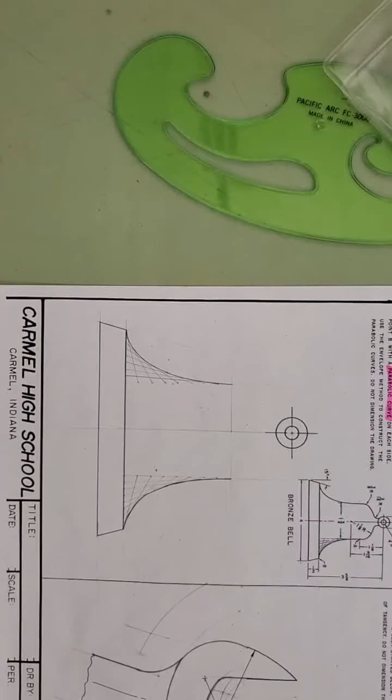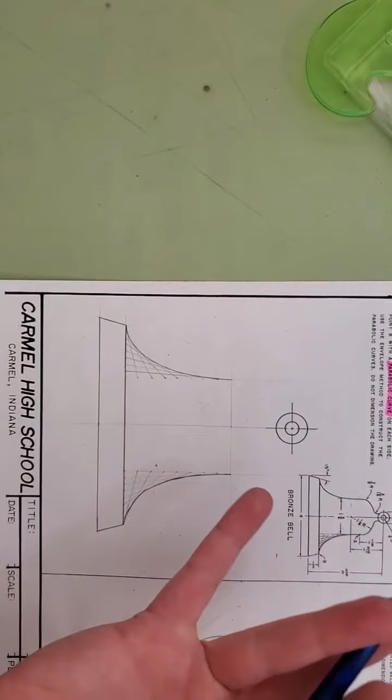So I just took a moment and I finished creating my second parabolic curve, and then I darkened in the curved lines, and you can see that my hand got a little bit shaky there. If you have a hard time keeping things smooth, you might utilize a French curve, which is just a tool that has different curves. But most of us, if you're not shaking like I do, you can just kind of plant this part of your hand down and just move your fingers to follow the line. You're gonna have to take it very slow, be very patient. But then I now have the base of my bell.

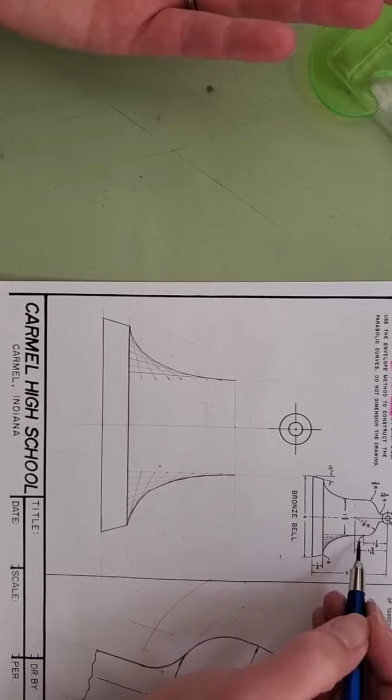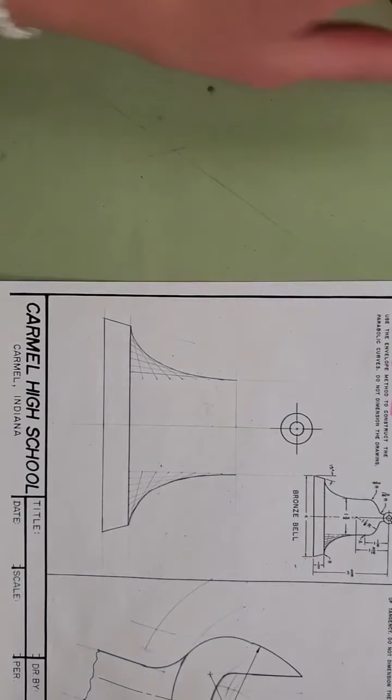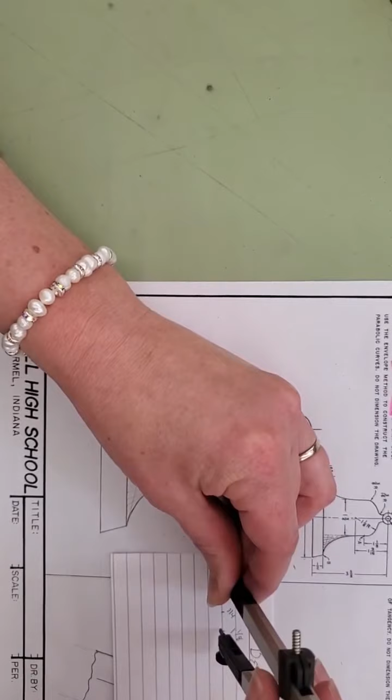So now the next thing I'm going to do is I'm going to be creating this arc that goes across the top of the bell. And its center point is 1 9/16 down from the center of the tip of the bell here. So from the center point here, 1 9/16, so there's 1, and that's 8/16, 9/16. So that's going to be my center point right there. And I'm going to set my compass to 1 1/8 inch. So here we go. And using that point, I'm just going to create a very lightweight arc.

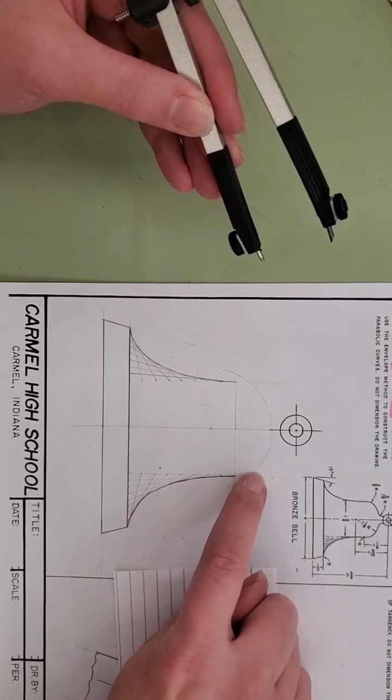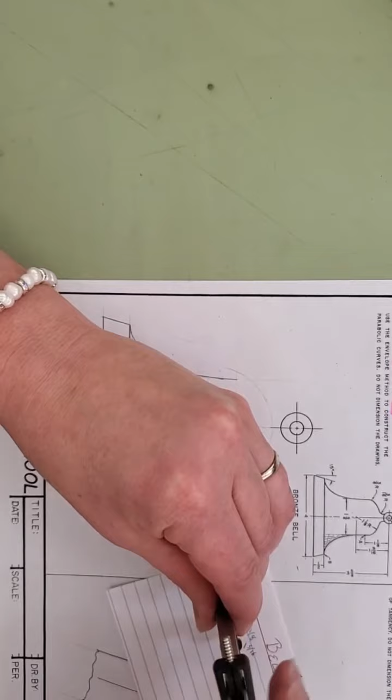So now you can see where this arc of the bell hits this straight line on either side. For arcs that are going to continue on in the same direction, you're going to subtract the radius of the smaller arc from the larger one. So 1 1/8 minus 3/8 equals 3/4. So I'm going to set my compass to that distance. Okay, and I'm going to create a smaller arc inside here. What I'm trying to do right now is find the center point for those little arcs.

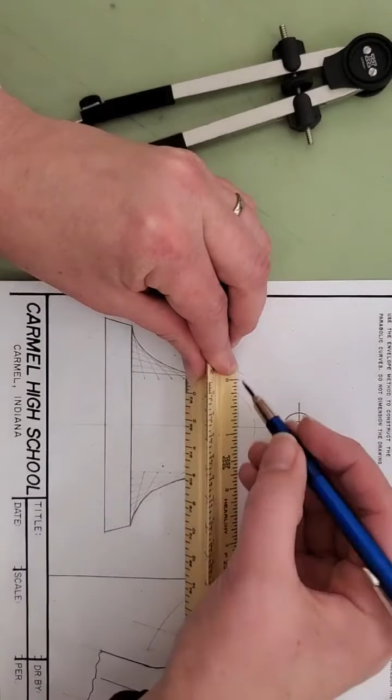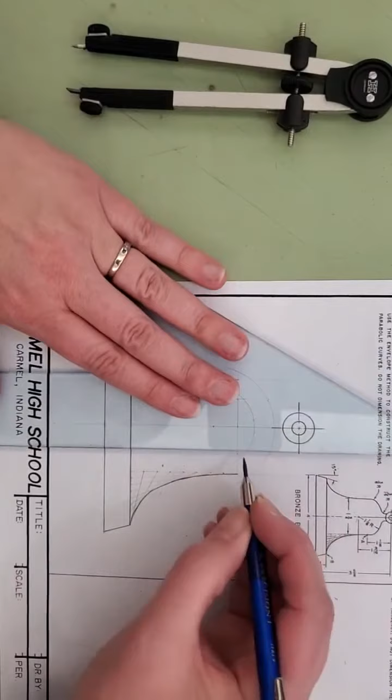So I'm going to come in from either side, here and here, my 3/8 inch radius. So there's 2 3/8. I think I moved that over a little. There you go. And 1 2 3/8. I'm going to extend those points vertically so they hit my new arc. Okay. And where those lines hit the newer arc, that's where the center point of my small arc connecting the large one to those lines is going to be.

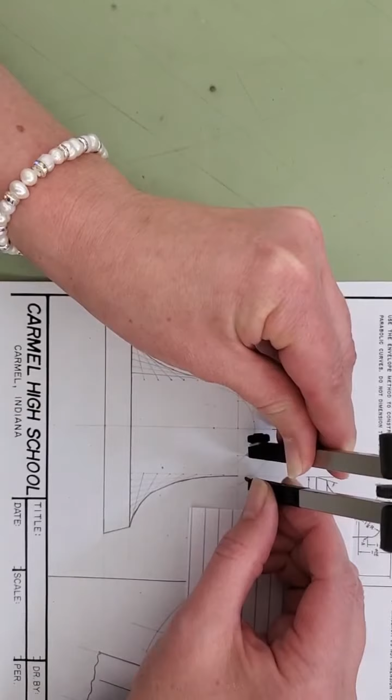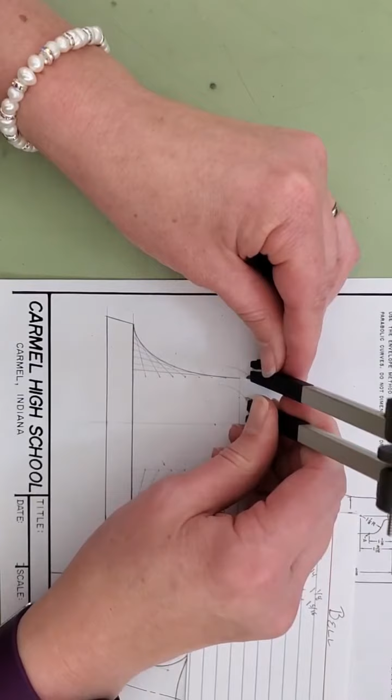So now I'm going to create my 3/8 inch measurement here. Put it at that intersection. And take time to make sure that you're putting it exactly where the arc and the line intersect. Okay. And do that same thing over here. Just take your time. It's not a race. Drafting is not a race. Okay. And now I can come in with my H pencil and darken in the rest of that vertical line until it hits where point A is.

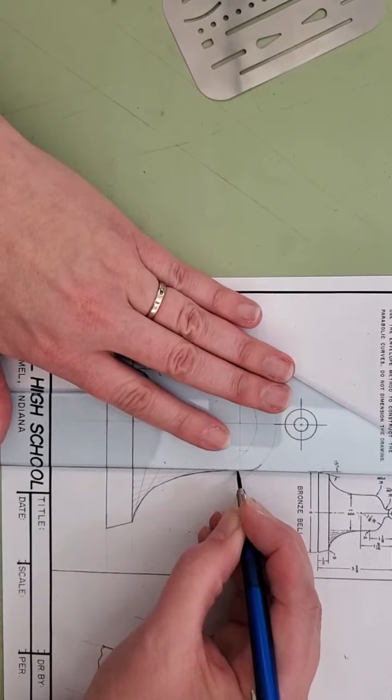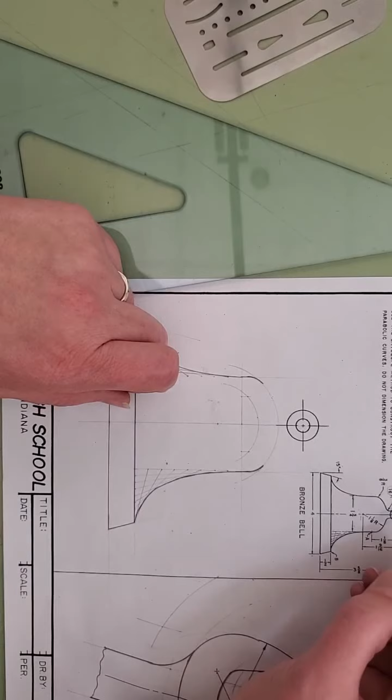Okay. I'm not going to darken this in yet because you can see from the bell up here there's no dark object line here. The next thing I'm going to need to do is find the center point for this 3/16 radius. Since it's going on the outside of the bell and it's changing directions, in fact it's going opposite directions of both the circle and the top of the bell, instead of subtracting the radius I'm going to add to the radius. So 1 1/8 inch radius plus 3/16 is going to be 1 5/16 radius. I'm going to use that same center point, and I'm just going to make a little, keep it nice and light.

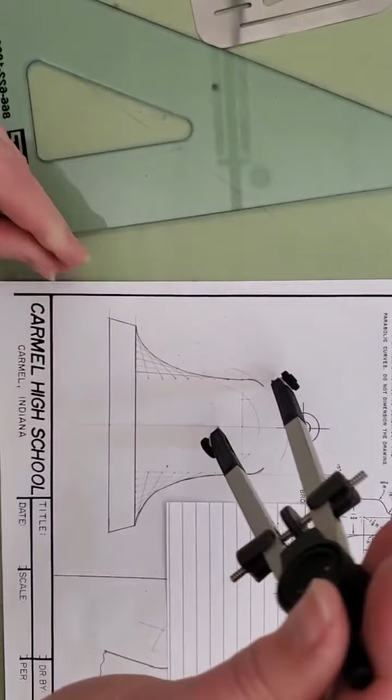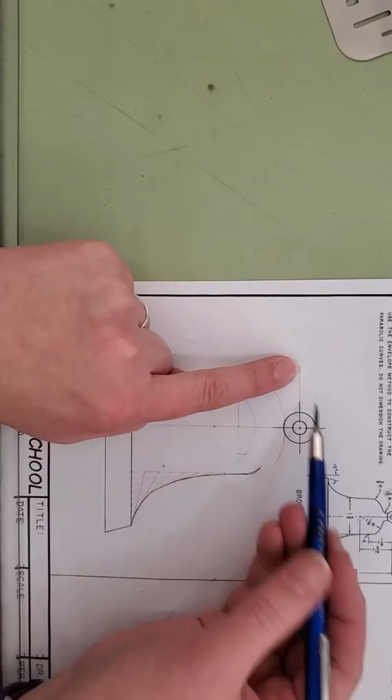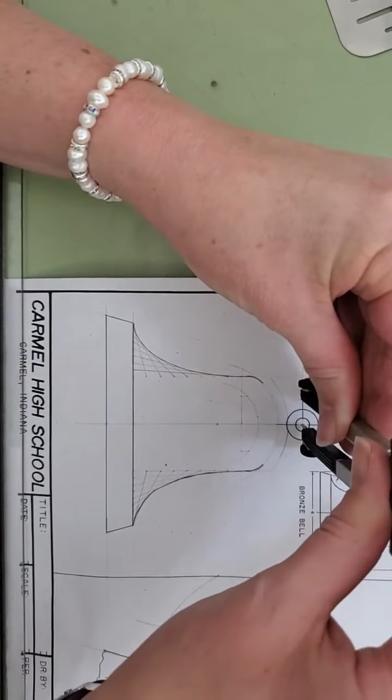Okay. I guess we kind of do know the diameter of that circle, but a quick way to just kind of get that 3/16 added on to the existing measurement, I kind of use an extension line, extend that out, add my 3/16 of an inch from the very edge of the circle. I just kind of add it out, and it just happens to be right there at the very tip of that line. So now I can set my compass to that dimension. Okay, and I can just kind of twirl that so it creates the little X's right here.

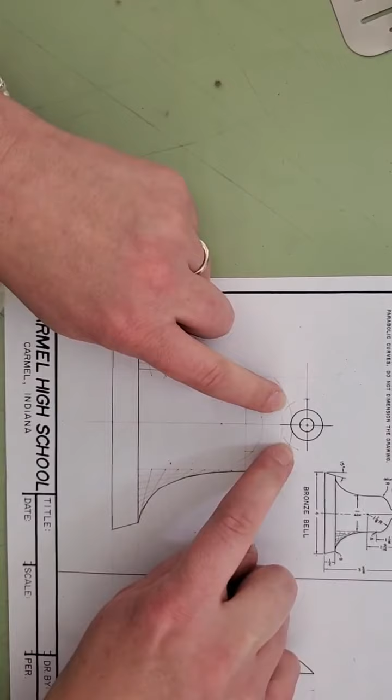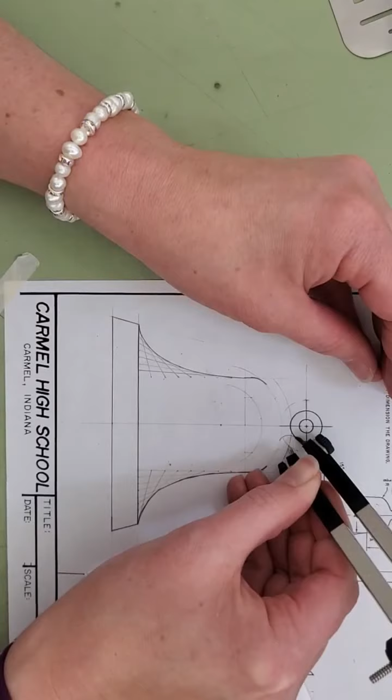I'm missing that piece of tape down here. I'm going to put that back. Okay, so now these are the center points for that tiny little 3/16 of an inch arc that's going to connect the top of the bell to the loop there. So I'm going to change my compass one more time. Okay, pick it up. And now I have the connector. And finally, I'm going to put my compass back to the 1 1/8, and I'm going to darken in these object lines here.

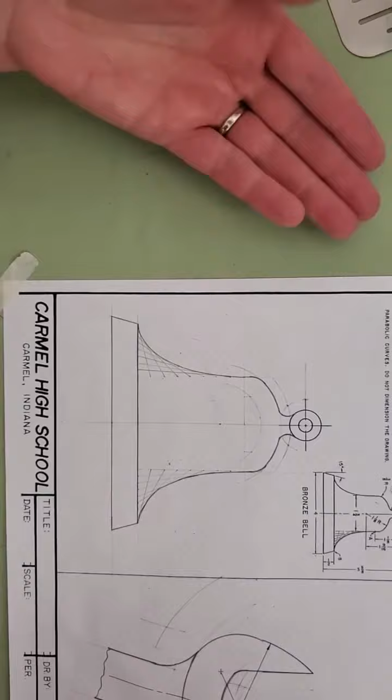And there you have it. We have created a bell using tangent arcs and parabolic curves.